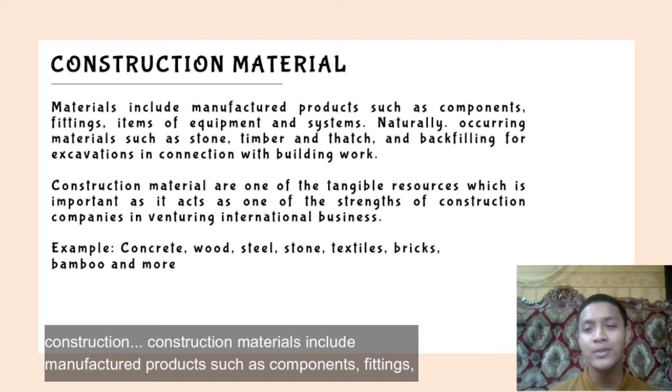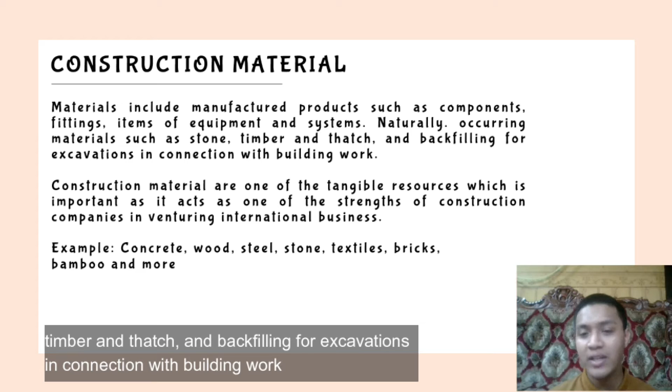Besides plant and equipment, material presents a major expense in construction, so minimizing procurement and purchase costs presents important opportunities for reducing costs. Without proper management of material, a project can fall behind schedule or can become unprofitable. So what is construction material? Construction materials include manufactured products such as components, fittings, items of equipment and systems, naturally occurring materials such as stone, timber, and thatch, and backfilling for excavation in connection with building works.

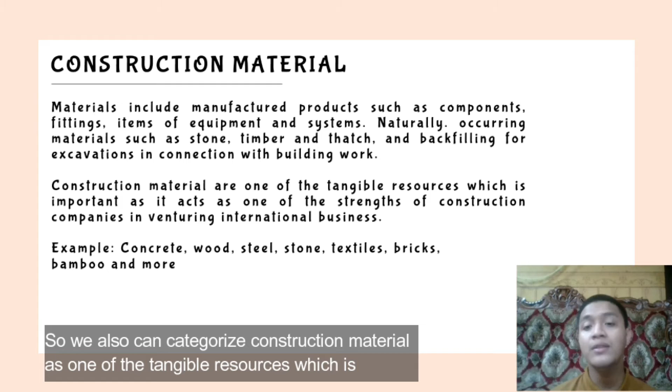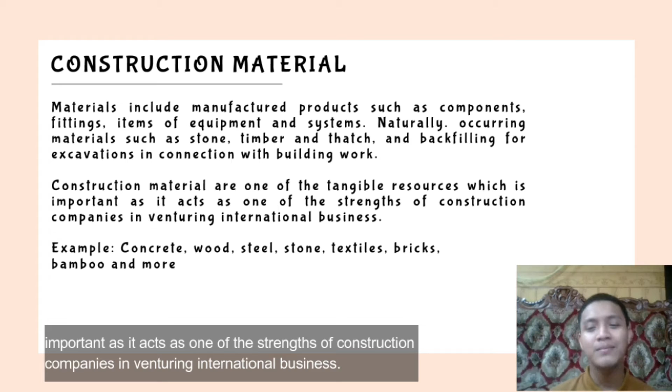So we can also categorize construction material as one of the tangible resources, which is important as it acts as one of the strengths of a construction company in venturing into international business. Examples of construction material are concrete, wood, steel, stone, textile, bricks, bamboo, and more.

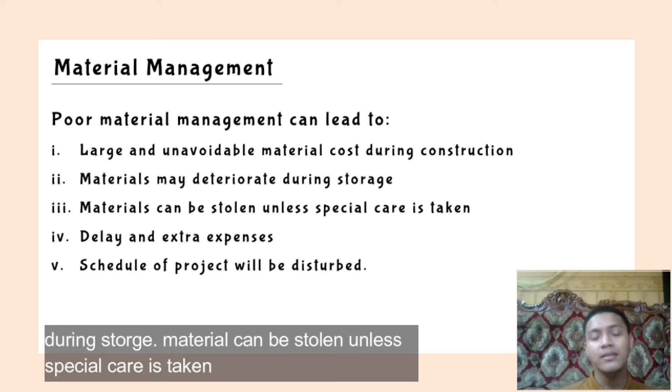Last but not least, poor material management can lead to large and unavoidable material costs during construction. Material may deteriorate during storage. Material can be stolen unless special care is taken. Fourth, delay and extra expenses. Number five, the schedule of the project will be disturbed. So these are some of the effects if construction companies have poor material management.

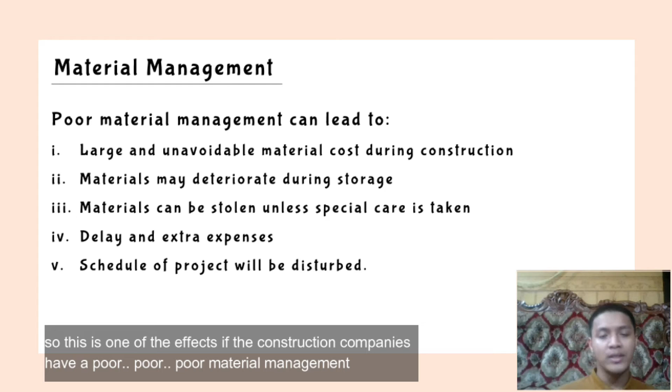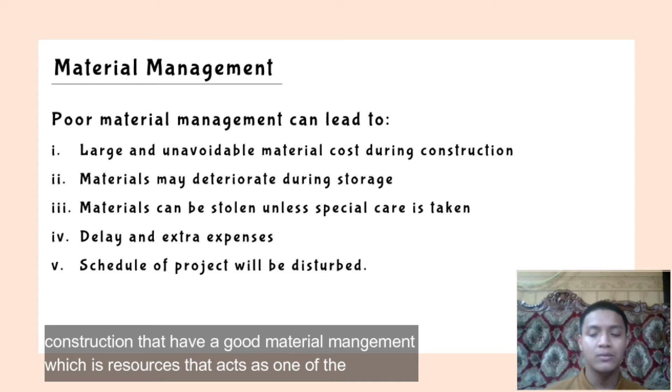A construction company that has good material management, which is a resource that acts as one of the strengths of a construction company in venturing into international business, does gain some impact, and it will help them to handle a project in a good manner because of this material management.

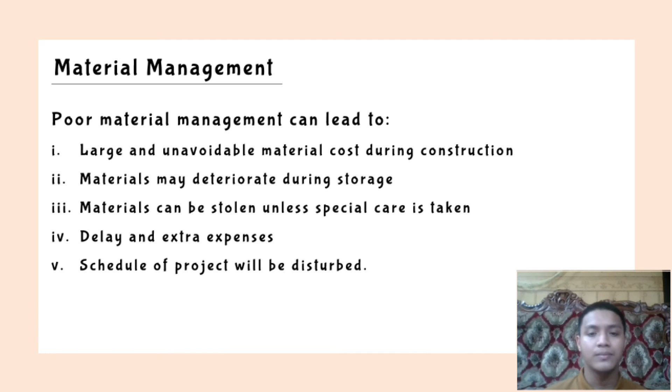Intangible resources. Intangible resources are those assets that a company owns but do not have a physical form. Although intangible resources do not exist physically, nor are they recorded on financial statements, they have greater value than tangible resources for the majority of firms. Intangible resources include technological assets such as patents, copyrights and trade secrets, reputation and corporate culture.

Now I will discuss the labor resources. So, what is labor? The word labor often means physical labor such as working in a factory or constructing a building, but broadly it can refer to any human input involved in the production of a good or service. This broader definition of labor is particularly important in today's technology-driven business environment, which has come to rely much more on the intellectual contribution of the labor force than the physical force in the production line. Intellectual contribution includes experience in and out of school, training, skill, and natural ability.

Basically, labor can be categorized in many different ways. First is by skill. The most basic is unskilled labor that does not require any training. It usually refers to manual labor such as site workers. The next is semi-skilled labor that requires some education or training. An example is a manufacturing job.